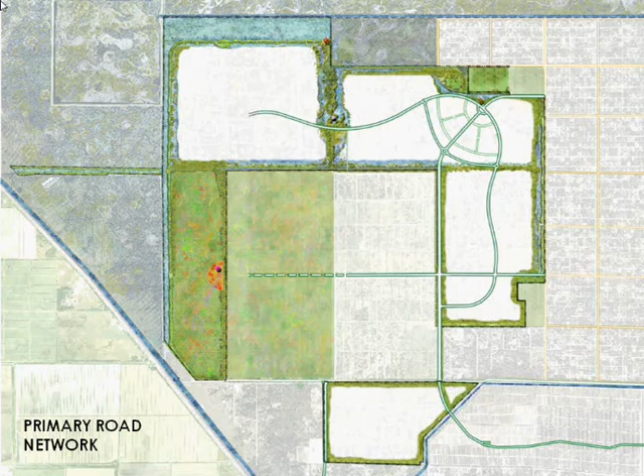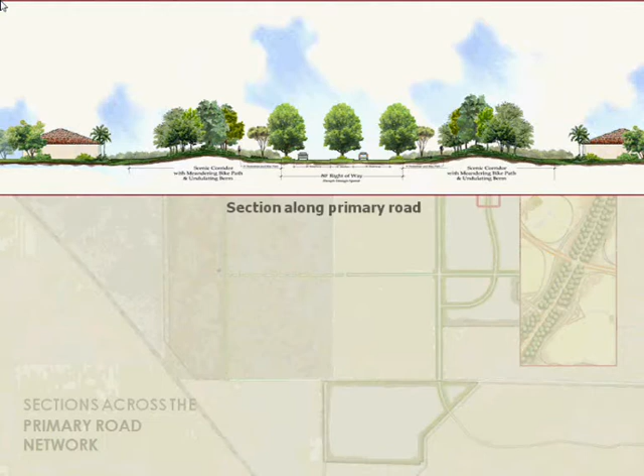Around the primary road network leading to the communities and possibly connecting to other developments are scenic corridors of 60 feet width on both sides of the road, with landscape plantings, trees and bicycle and pedestrian paths. Conceptual sections along this corridor indicate the right-of-way and the scenic green 60-feet area on both sides of the road, with undulating berms and meandering bicycle paths.

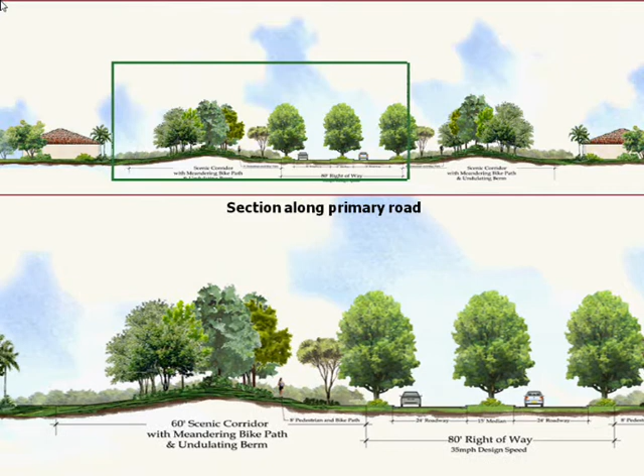An important feature of our plan is to create an interconnected system of greenways, with rest stops at culminating points along the axis. This greenway trail will continue even along the west side flowway, creating a unique experience for its users.

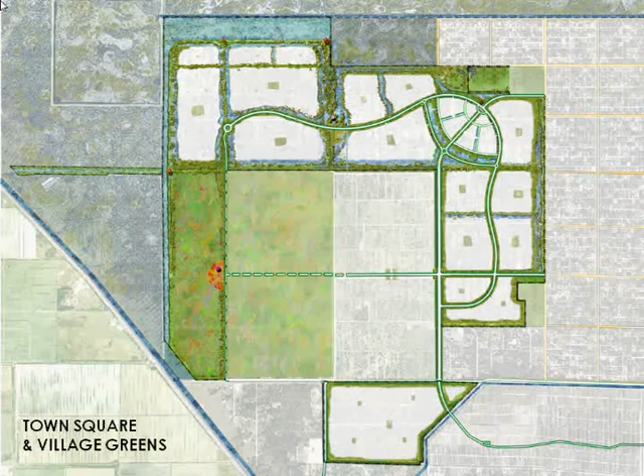The interconnected network of pedestrian and bicycle paved and unpaved trails will allow more than 20 miles of scenic walkable areas, in addition to the internal sidewalks of individual neighborhoods. Village greens, town squares, community parks and recreation areas will further enhance the quality of the neighborhoods.

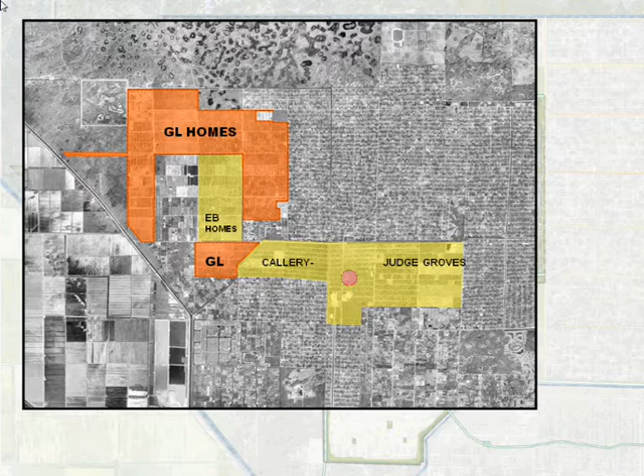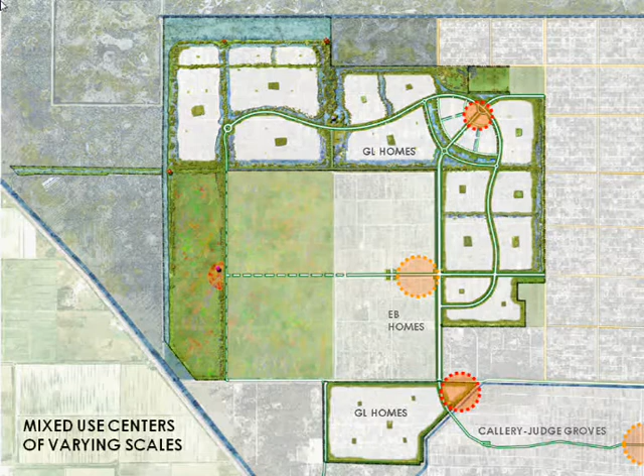As previously mentioned, our adjoining developments will have centers with employment, educational, civic and commercial uses. To complement these future neighboring town centers, on our site, mixed-use centers with multi-family residences are proposed near areas of frequent commute as well as near the regional park. The locations of these centers are determined by the feasibilities to attract the maximum influx of residents and neighbors and become lively public areas.

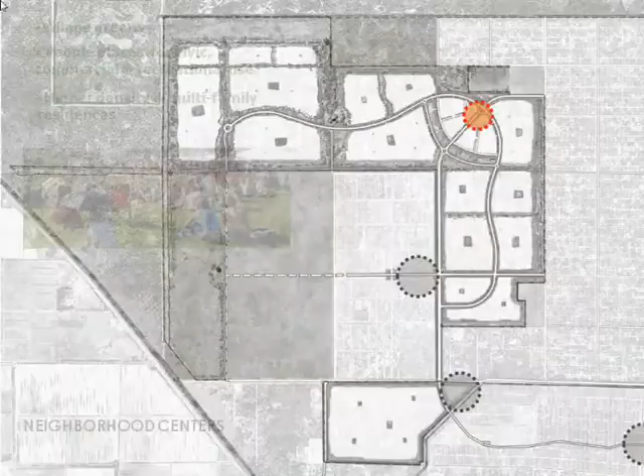The Southern Mixed-Use Center will have areas for commercial, civic and multi-family residential uses. The center near the regional park will also have higher density with public spaces.

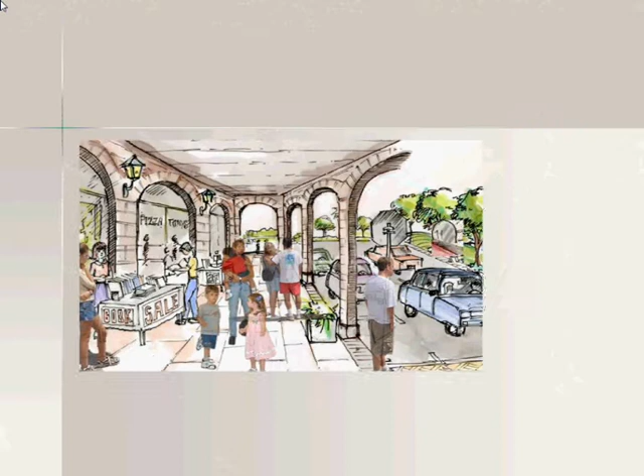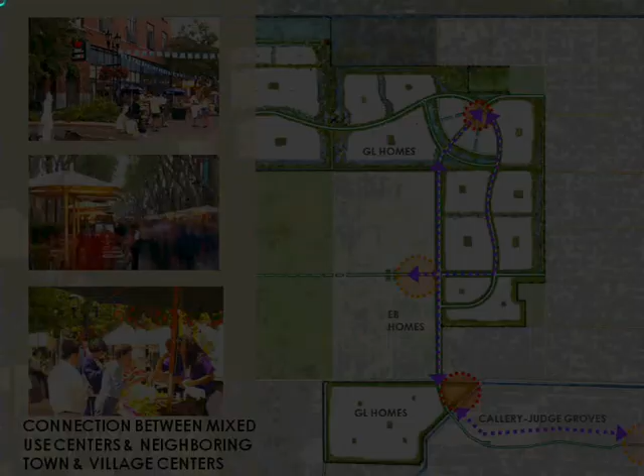The intent is for our town centers and mixed-use centers to form a series of connected activity hubs with those of neighboring proposed communities. Besides our green spaces, commercial centers and residential areas, institutional additions will also be made. Along with the existing elementary, middle and high schools, 2 new school sites for elementary schools are proposed, as well as areas for designated civic use.

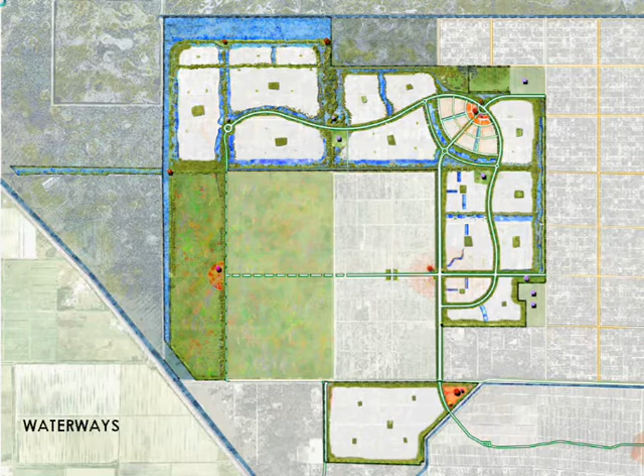The open spaces of the plan will include not just green vegetated areas, but also an interconnected functional waterway system. These waterways will include canoe trails. Public canoe trails from the launch and pickup areas near the regional park up to the nature center and rest stops will span several miles. In addition, the stocked fishing lake proposed in the nature center will also allow boating and fishing in a quiet, relaxed setting.

And finally, after a careful synthesis of greenways, waterways, environmental and community features become part of a cohesive system.

The master planning of Indian Trails Grove takes into account the fact that a project of this scale and size has several commitments to fulfill to its future residents, to its neighbors, and to the region as a whole.

Scenic and functional open spaces, regional environmental features, rural character, a mix and variety of housing types, enhancement of the surroundings by balancing and supplementing amenities, and sustainability and stewardship. All these aspects and expectations are part of our design goals.

We hope to build a series of communities that are surrounded and enhanced by beautiful, varied open spaces, enchanting greenways and waterways, help restore the wetlands through its flowway and provides learning grounds through its trails and nature center.

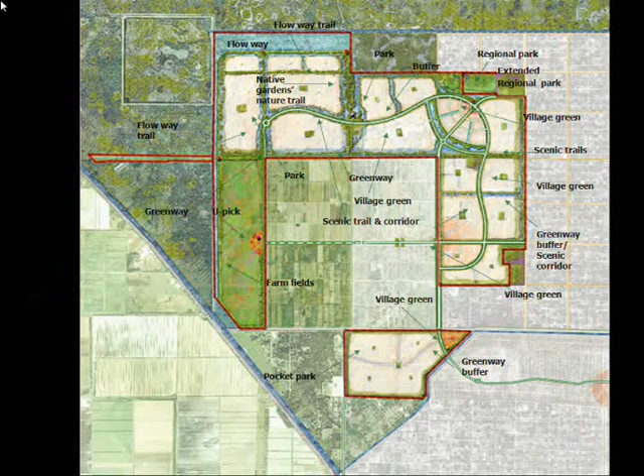Most of all, with its location close to one of South Florida's world-renowned natural landscapes, it gives the opportunity of a unique place to call home.